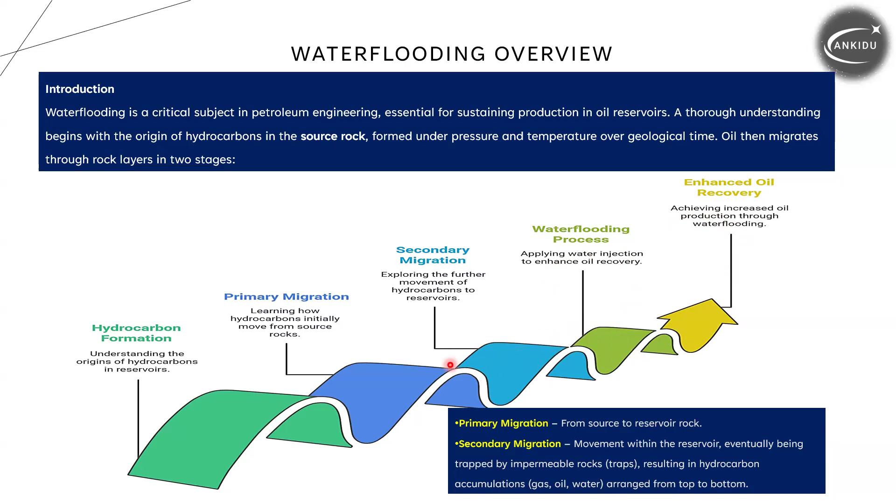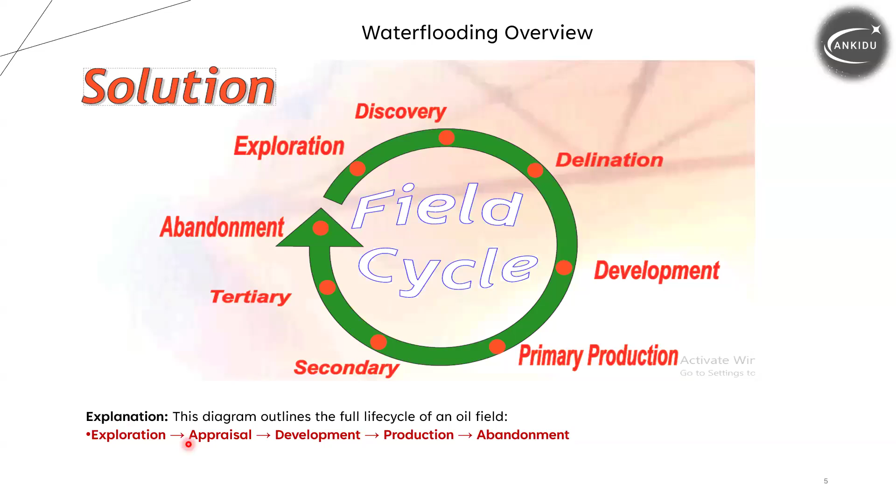Apart from the type of the oil field, is it gas, is it oil, or is it both? So it's going from exploration to abandonment. So let's move through our presentation.

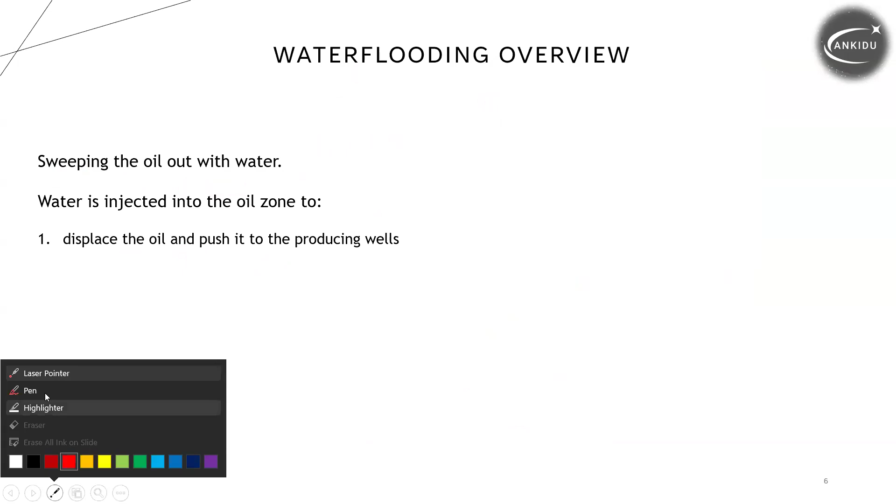So, water flooding overview. It's sweeping the oil out with water. Water is injected into the oil zone. Of course, we know we have to inject some water inside our reservoir. This means displace oil and push it to the producing wells. We know for sure we have a reservoir, and we have both injectors and producers. So we have oil here, and we have water here.

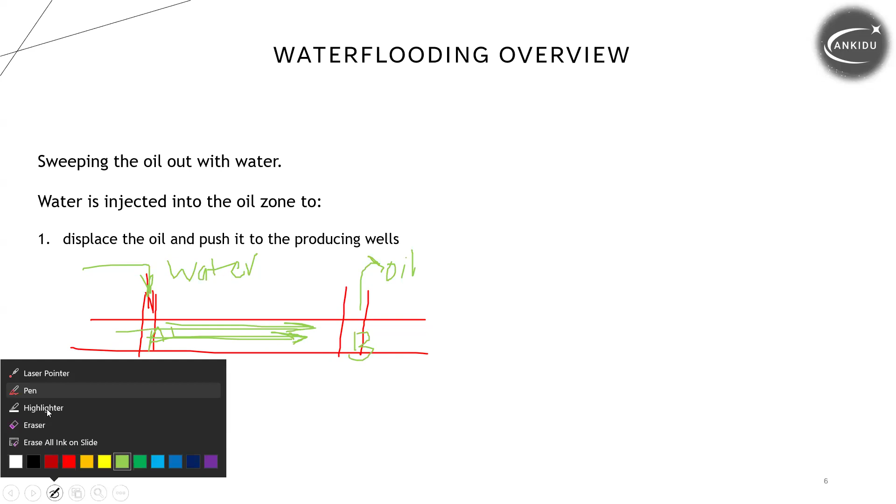So we need to inject water to push some oil to that point and then extract it from the other place. It's a very simple illustration to understand where we have to push some oil from, let's say, point A to point B, and which layer we have to push the oil through from one point to the other. So understanding this is the starting point for understanding what the water flooding principle is. Okay, so let's move on.

So displace the oil and push it to the producing wells. Maintain reservoir pressure. Of course, we know when we start production, the oil rate will rise and then reach what we call a plateau rate, when the production is stable, and then at some point we will see declining production. Why? Because we already have a pressure, and that pressure will decline, and this pressure supports the oil production.

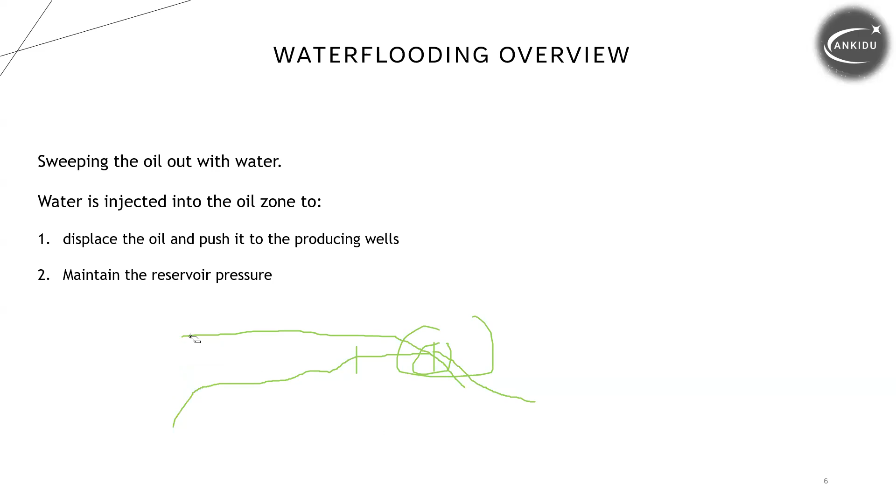When it's declined, at this point we need to think about what we can do to our reservoir to enhance the production. Otherwise, we will lose production significantly from that oil field, because there is no support for that reservoir pressure. So what we can do is water flooding, one of the techniques we use to maintain reservoir pressure. Water is an effective displacing fluid because it's simple and cost effective.

So what are the economics of water injection? Let's see. It's cost: water supply wells, water treatment facilities, pump stations, flow and injection lines, water injection wells. It's considered the most attractive oil recovery method because it's very simple and cost effective.

Having said that, what is the limitation? A significant amount of oil is left unrecovered, because a lot of things happen when we inject water through our reservoir. When using water flooding techniques, some part of the oil is still left. It depends on the field properties, rock properties, reservoir properties. So some amount of oil will be left, and reservoir studies will help us understand why we have this limitation in using water flooding.

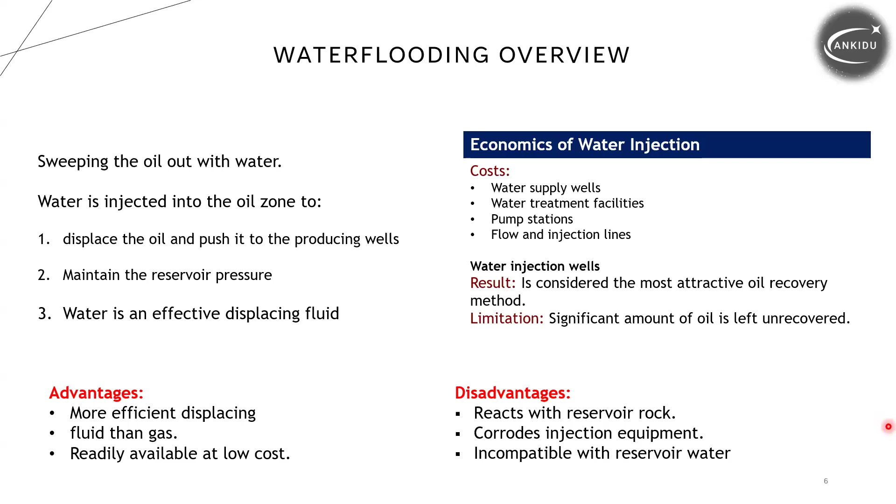Incompatible with reservoir water, of course, there's some incompatibility with reservoir water. Then we have some issue regarding plugging inside our reservoir, how we can mitigate this. It's one of the things happening through the water flooding techniques used to enhance our reservoir pressure and our production.

So, water flooding overview: secondary recovery method. It's considered a secondary recovery method. So inject water to displace oil. Why? We know we have some decline in reservoir pressure. Then we have to inject water to displace oil when, let's say, the aquifer is not enough to support the displacing of that oil, so we need to use another secondary recovery method, which is water flooding, for instance, in our case today.

Maintains reservoir pressure. Again, it's because we are losing some power that's pushing the oil to the surface, which is the reservoir pressure, because we have some dissolved gas, and that gas will separate from the oil. Then we are losing the power to produce more oil to the surface. So it's a secondary recovery method. We use water flooding to maintain reservoir pressure. Cost effective: because it's cost effective, it's widely used.

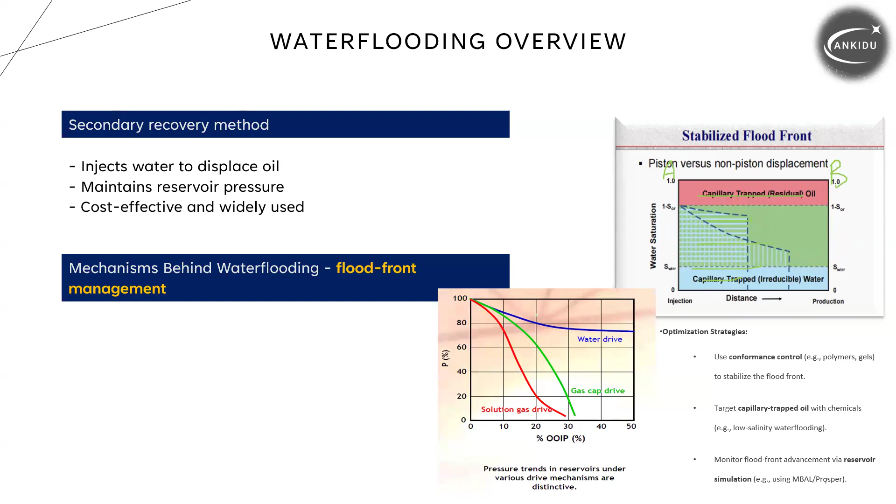So let's see this illustration, starting from this point to this point, which is piston and non-piston displacement. We know already what is piston, so it's piston-like, starting from 0 to 1 when we have all this front going to displace oil from point A to point B. So let me use the pen. So if we decide this is point A and this is point B, all the oil goes in this direction. Let me change the color.

So all the water is going from this direction in a uniform way. So assume a sharp uniform flood front where water displaces oil perfectly. So it's going like this from point A to point B, like a piston, pushing oil forward. Is that happening in reality? No. So this is the ideal situation, which we call the piston effect.

So what is the non-ideal situation? What is really happening? It's non-piston displacement. This is what is actually happening. The flood front is diffuse, with water fingering through the oil. Why? Because we have viscosity differences, capillary pressure forces, or maybe variations in permeability. This all leads to uneven sweep efficiency.

What will happen? We have some trapped oil and irreducible water. So not most of the oil moves from this point to this point, and then we have this phenomenon, which is piston and non-piston displacement. So, mechanism behind water flooding: we need flood front management, because water flooding is the most probable and usable technique, since it's cost effective and can maintain the pressure, compared to other types of pressure enhancement in our field.

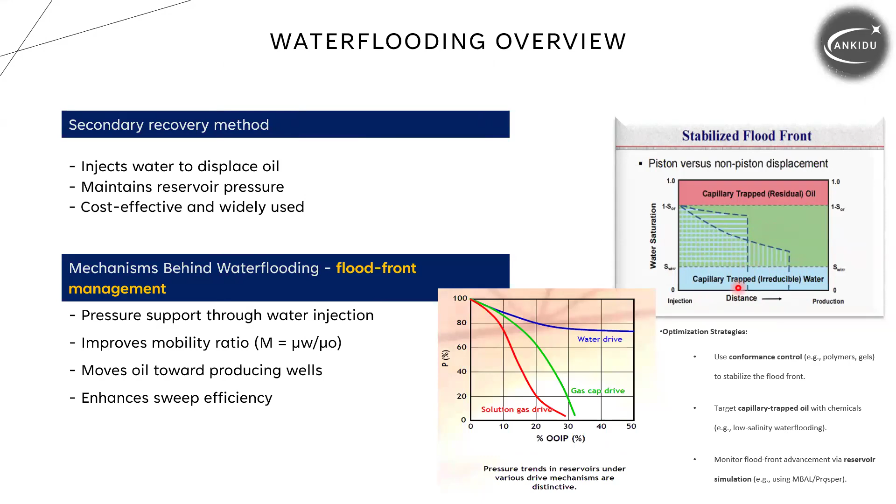And of course, we saw from the previous illustration we have irreducible water, and that's immobile water in the oil zone before flooding. So sweep efficiency we can see through the previous diagram, if we go back. This highlights the challenges of incomplete sweep. So we don't have a complete sweep because of that effect. Okay, so let's go back again to our equation.

So the equation's parameters: it's the porosity, which is the fraction of rock volume occupied by pores. So higher porosity means more oil storage, and for the impact we have an exponent factor of 0.0422. Then the initial water saturation, the fraction of pore space filled with irreducible water before production. A higher SW reduces recovered oil, so that's why we have

a negative sign. The oil formation volume factor is the ratio of oil volume at reservoir conditions to surface conditions. Higher Bo means more gas in solution, so this slightly improves recovery. And we have the permeability and thickness of the reservoir. So we need all these factors when we calculate the primary recovery, estimating our recovery factors through our

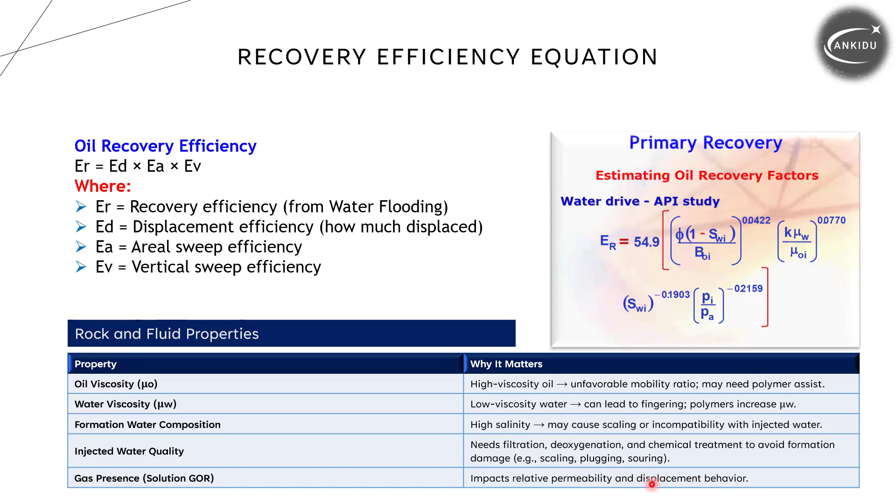So it provides natural energy, of course, but may reduce oil mobility and complicate displacement in secondary or tertiary recovery. So it needs more gas cap management. Okay.

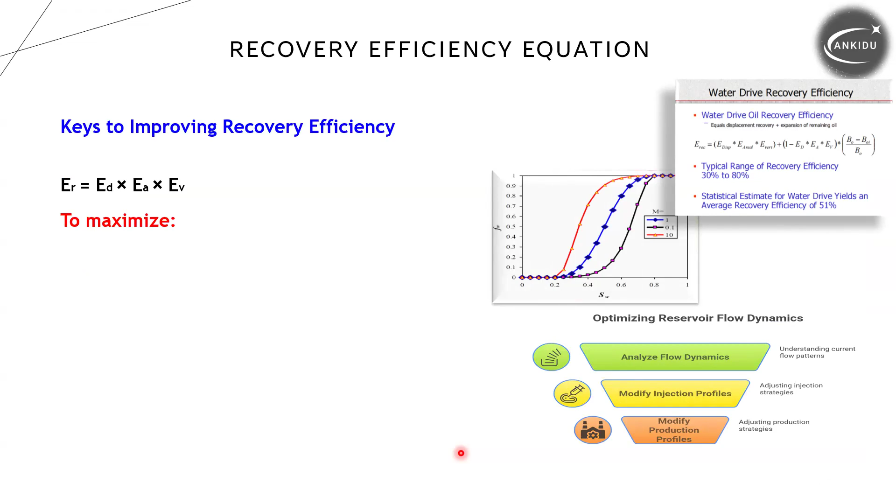So again, to the recovery efficiency equation. So what are the keys to improve the recovery efficiency equation? For the displacement, lower or eliminate capillary forces and lower the mobility ratio. For the area swept, lower the mobility ratio and maybe modify the flood pattern. We will see what flood pattern means. Use infill drilling to enhance the area.

And lower mobility ratio, of course, modify injection and production profiles. Sometimes we need to change the injection rate or the production rates. Then it's very important to manage the profile of both production and injection to have the right results in terms of mobility and sweep efficiency when we consider our injection rates. So use a selective injection and production program. So how we can manage or control that using the selective injection and production program.

So analyze flow dynamics and modify injection profiles, modify production profiles, all working together to optimize reservoir flow dynamics. Otherwise, we have some problems in terms of recovery efficiency. So the typical range is from 30 to 80%. So do we get 30 or 80? It depends how we can modify production and injection. Sometimes more water injected into the reservoir does not mean that we have more oil produced.

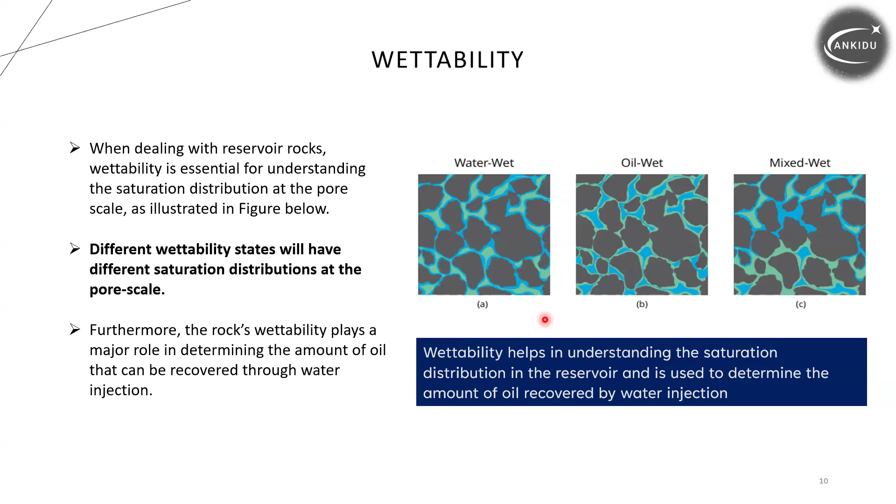What are the factors affecting sweep efficiency? Let's see in terms of the reservoir. Mobility ratio: we know mobility ratio has a huge impact on sweep efficiency. The mobility ratio is lambda displacing over lambda displaced, so it's about permeability and viscosities for water to oil. The mobility ratio should be less than 1. How can we manage that? It's more favorable to have a mobility ratio less than 1.

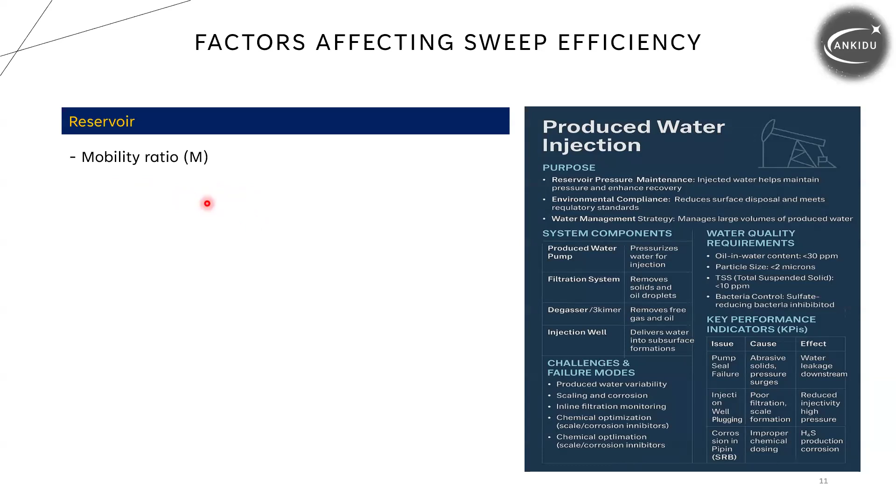The displacing fluid, for instance water, is less mobile than oil, so we have a stable flood front and high sweep. Low viscosity oil with a high viscosity polymer solution may be more favorable. If the mobility ratio is more than 1, we may have viscous fingering and poor sweep efficiency. Reservoir heterogeneity, gravity segregation, and permeability contrasts also matter. Permeability plays a crucial role in sweep efficiency, whether the reservoir is more or less permeable.

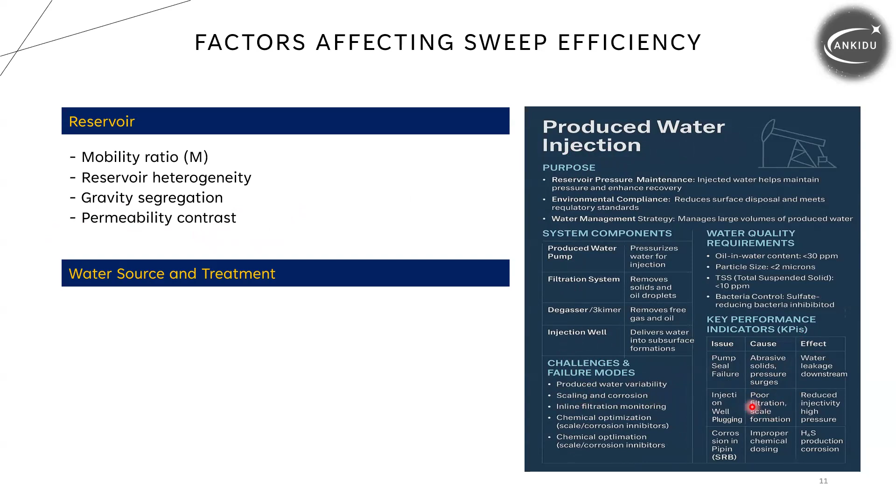For produced water injection, some challenges and failure modes are produced water variability, scaling, and corrosion. What are the key performance indicators? How can we see if sweep efficiency is working well or not? We have metrics for the injection rate and producing rate, corrosion, whether injectivity is reduced, whether we have high pressure, water leakage downstream. We should think about our KPIs for water injection and sweep efficiency.

Water quality requirements: what are the sizes of the particles in the water injected into our reservoir? Do we need bacteria control, maybe for sulfate, and reducing issues regarding asphaltene in our injection wells, which we have seen many times. We have to think about the water source and treatment: surface, produced, and seawater are all sources. Produced water should be treated and re-injected meeting our water quality requirements for the reservoir.

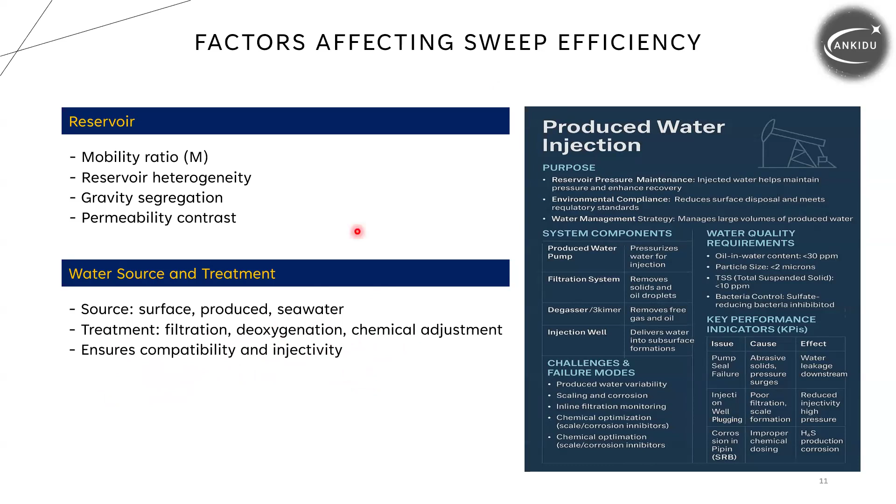We control particle size and total suspended solids in the water injected into our reservoir. Removing these solids is very important, and we can recalculate sweep efficiency after treating our water. This ensures compatibility and injectivity: is the water compatible with our reservoir properties, and is the injectivity compatible with the reservoir's ability to have high sweep efficiency? All these factors play a crucial role in sweep efficiency.

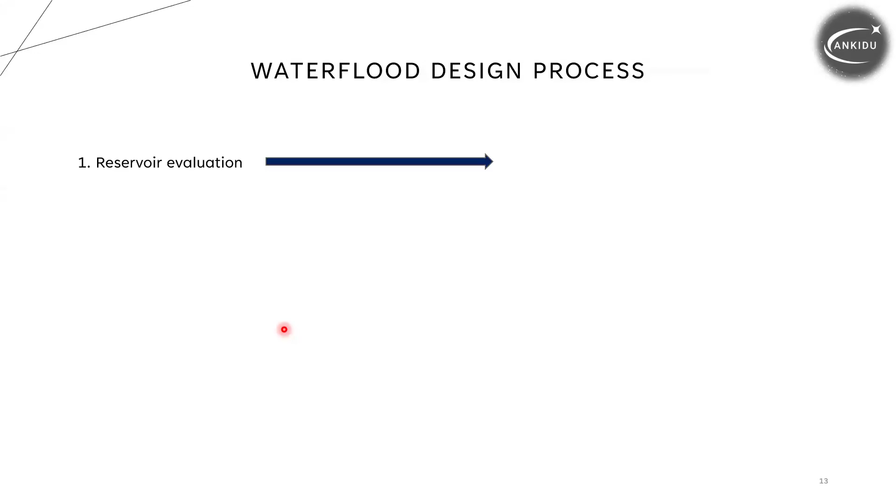Now, the water flood design process: reservoir evaluation. Let's take a look at what reservoir evaluation means: the data to be studied and collected as reservoir characteristics.

Again, we just mentioned what the rock properties are, the permeability, porosity, everything regarding the reservoir characteristics: the areal and vertical extension, isopach, zonation, etc., rock properties, directional permeability, porosity, heterogeneity, reservoir fluid, gravity, formation volume factor, primary production mechanism, what we have in terms of production, what type of production we use, the drive mechanism.

Is it gas cap, do we have an aquifer in our reservoir, what is the pressure distribution inside our reservoir, the oil distribution in the reservoir: is this place more gas, this place more oil, and this place more oil and water? So we have to think about all this in terms of reservoir evaluation. Then we can think about what waterflood design is needed for that reservoir.

Flood pattern selection. After all these data are studied, then we can go for our flooding pattern selection. What is more affordable and compatible according to all these data? So we can run our simulation and think about the flooding pattern selection. And after selecting the right pattern for our reservoir, we can run the simulation and see the estimated efficiency factor for that flooding pattern selection.

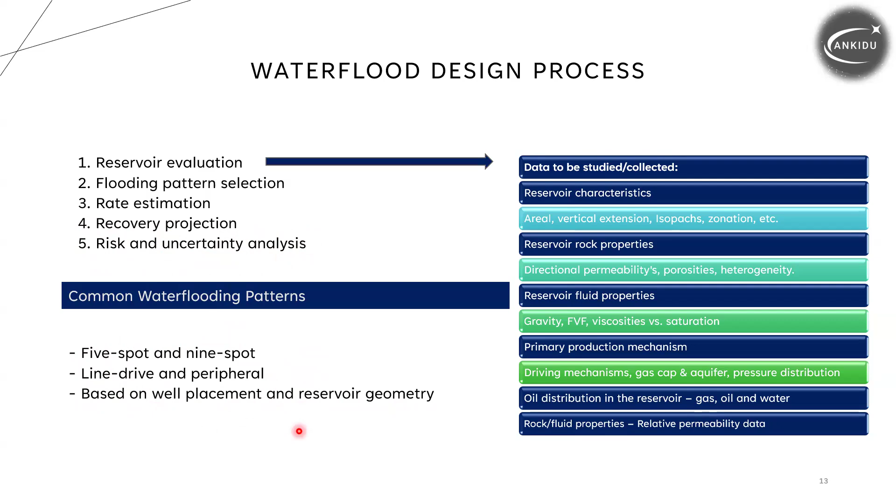So, common waterflooding patterns: 5-spot and 9-spot, line drive and peripheral, based on well placement and reservoir geometry. These are the common waterflooding patterns. So let's see the waterflood layout. A reservoir study is necessary for the proper choice of what?

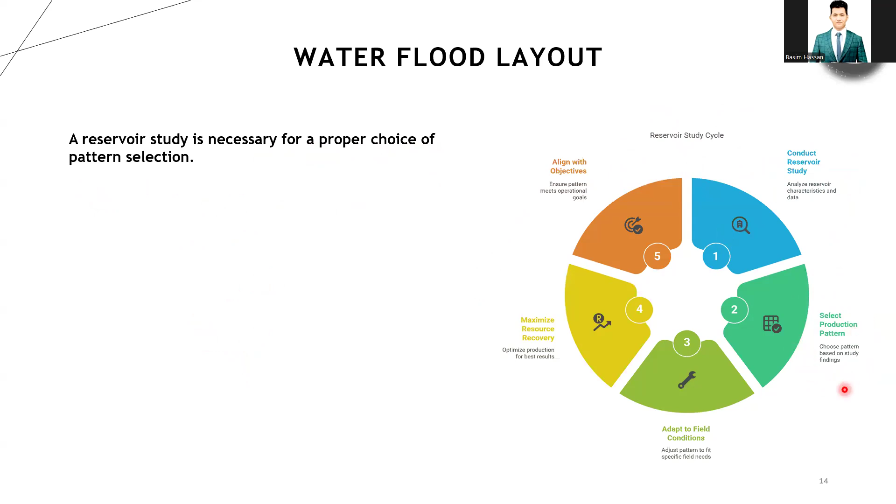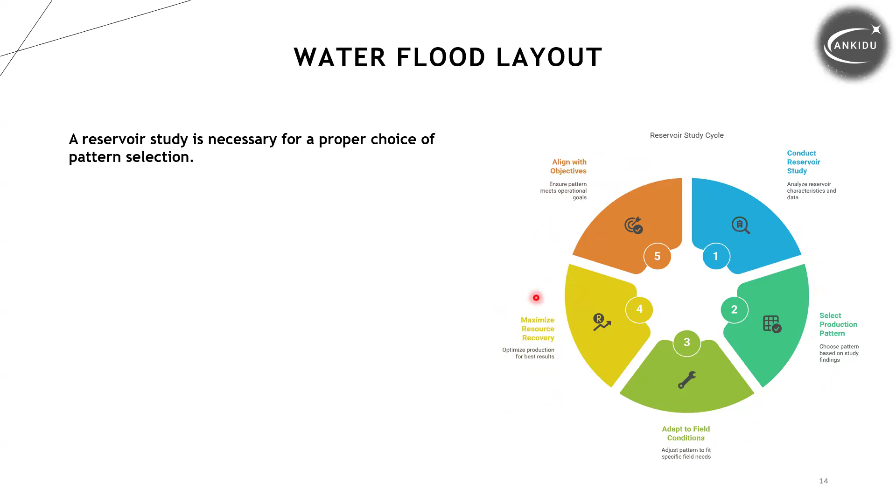Pattern selection. If you don't have your correct reservoir study cycle, you have to conduct the reservoir study, select your production pattern, and adapt to the real field condition, otherwise you don't have this output of maximized resource recovery. So you need to go through these points. It's an essential, mandatory, crucial rule to follow to maximize resource recovery, aligned with your goal of reaching 60%, 70% recovery from your field.

Okay, so in-house study, consulting reservoir engineer: the selected pattern should provide the desired oil production capacity. We think about 70%, the recovery factor we have. Then there's the oil production capacity, for instance, 1 million barrels per day. Then it should be this pattern. The waterflood layout should meet the oil production capacity and provide sufficient injection capacity to support the oil.

Even after selecting the proper layout, without sufficient injection capacity you don't have enough resources, and you cannot reach your production capacity. We already talked about the injection rate: monitor the injection rate and alter it according to your goals. Maximize oil recovery with a minimum of water. How can you manage that?

Sometimes you're injecting more water into your reservoir but not reaching maximum oil recovery. Why? Maybe there are some aspects or risks you didn't mitigate. For instance, you have fractures or fingering inside your reservoir, and all the injected water goes through the fractures, and you don't reach from point A to point B, from this injector to these producers. You don't have correct sweep efficiency inside your reservoir, so you cannot get the expected oil production capacity. So maximize oil recovery with a minimum of water.

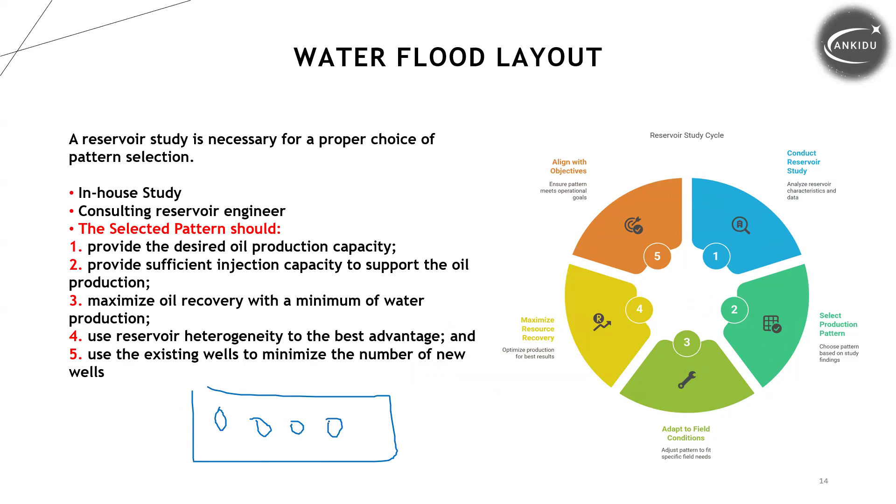What does that mean? The last point, number five. Sometimes you don't have to drill new wells. Maybe some producers will be converted to injectors, and then you don't have to consider new wells. Let's say this is our field, and you have these producers, and you want to use the right pattern selection; then maybe it's good to convert these producers to injectors.

So keeping the producers, it's good to have these wells as injectors. This will minimize the number of new wells. You don't need new wells to be drilled, and you can use them for water injection. You can consider that after conducting the reservoir study.

Otherwise, you cannot imagine whether there is any connectivity between these layers, and whether it's an effective connection, with effective permeability and porosity, etc., these reservoir properties and characteristics. Then you cannot put the right, proper selected pattern for your water flood layout. So this selected pattern is modified as needed to fit the condition of the specific field. This is very important.

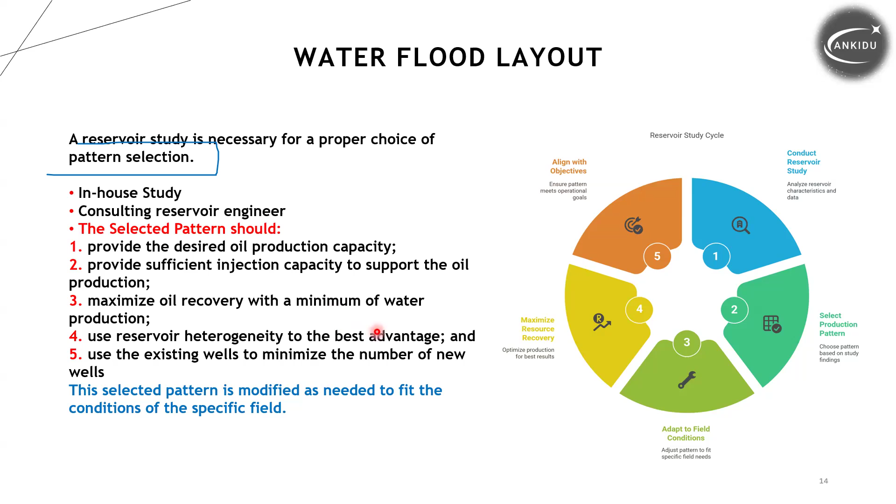This pattern can be okay. I select these wells as the producers and these as the injectors. Maybe I can change it afterwards, I mean the producer to injector to enhance the recovery, change this well to injector as needed to fit what I have in terms of oil production capacity. So you have to think about what you can do. It depends on your monitoring, your outcomes, your management of this water flood project. You need to select the right, proper way.

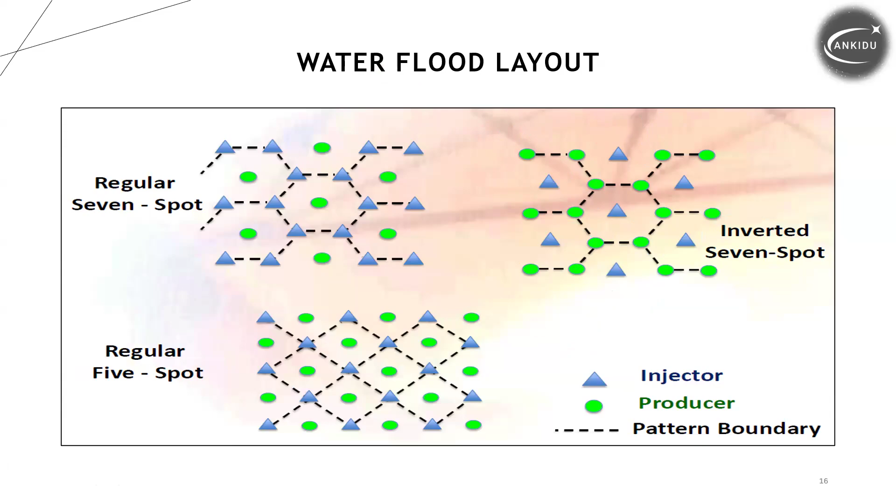Is it fair enough for our reservoir, or maybe we can change this well to an injector, leaving this injector, and inject through this one, because after studying the reservoir layers, there's a good connection between them. Then we can enhance the production from 2 to 5 here and get the targeted oil production rate we planned. These questions can be raised; ask yourself through your simulation, is that what we need from this water flood layout? Okay, let's continue.

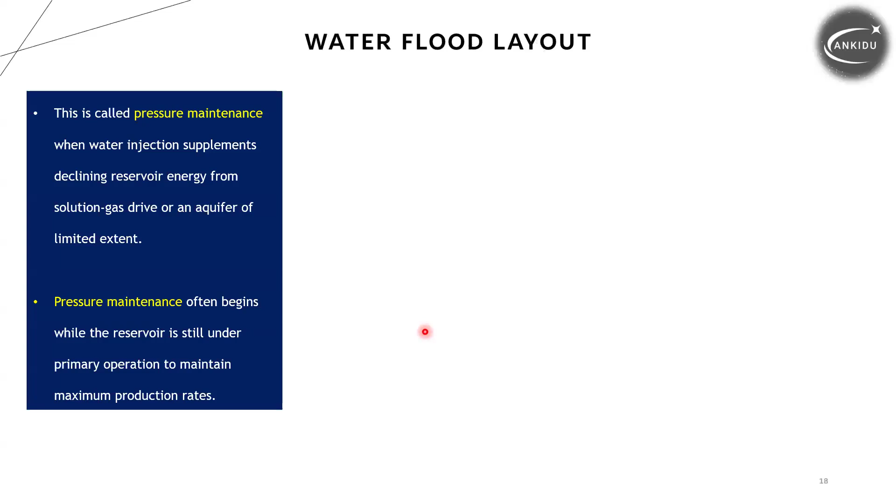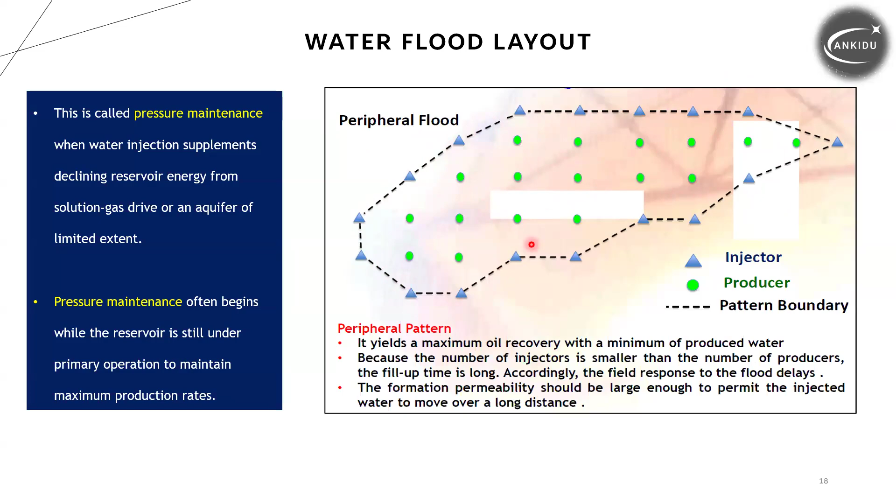Okay. So pilot test. Why do we need a pilot test? How is this related to flooding patterns? Any prediction of reservoir behavior under water flood has a high level of uncertainty. So why do we have uncertainty? Because we've just seen, for example, some wells don't produce as much as we planned through our flood pattern. So a pilot water flood project is a small-scale project, carefully selected.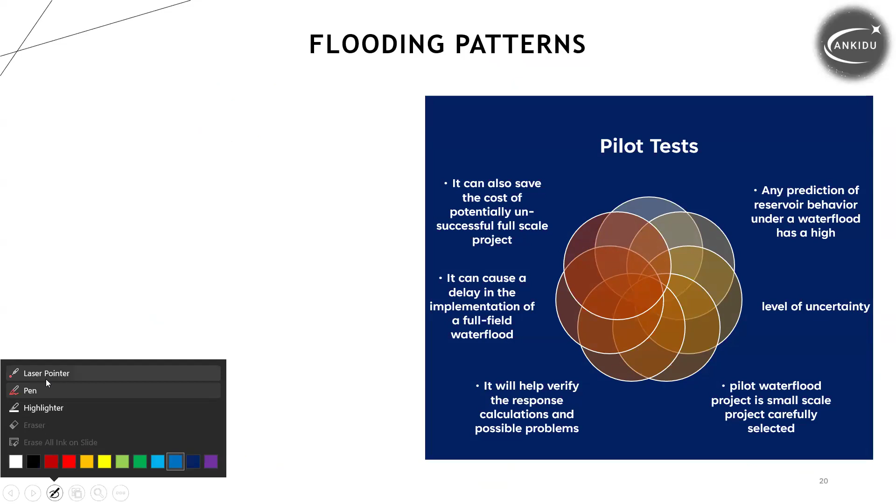So this is what we call here the pilot project, and sorry for my writing. And this is the normal project. Maybe we do all the calculation here and see the response is not as much as we want, so we will not go to the second phase. This is phase one, and this is phase two, and we will not move forward to the normal project. Why? Because we've seen there's a problem in terms of the outcomes of our calculation. So this will delay implementation. It can also save the cost of a potentially unsuccessful full-scale project. That's why some companies go for a pilot test.

We have it, we've seen it conducted in our reservoir. We have a pilot test, and then we can see. It depends on the time considered for the project. Is it a 1, 2, 3, 4 year project? So from day one, we have a pilot test for 3 months, 6 months. It depends on the outcomes and what the response calculation is.

So injection wells and spacing. Well spacing is determined by the primary drilling spacing. Producers are converted to injectors, maybe. New infill injection wells are drilled as required, for instance when we need to drill new wells. Production loss from converted wells: we have to consider how much we lose because we convert some wells to injection wells. So what is the production loss? It should be considered because we have a target oil production rate afterwards. Usually very low net oil rates when water flood is applied.

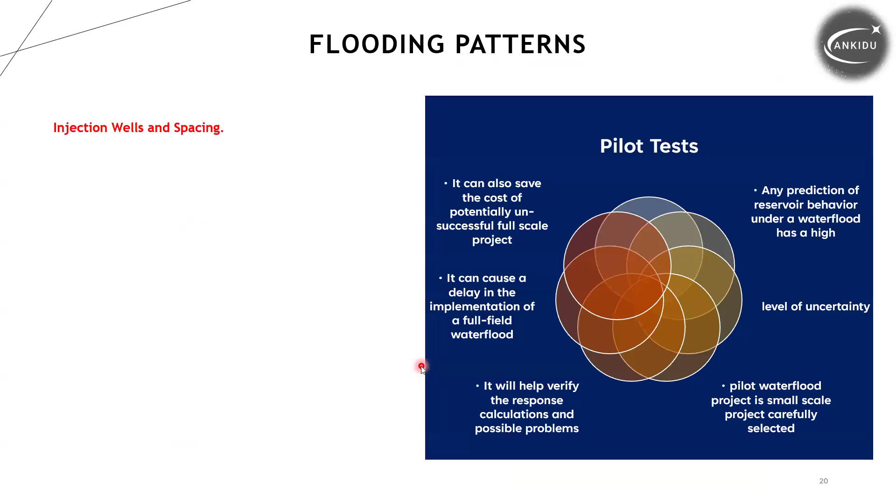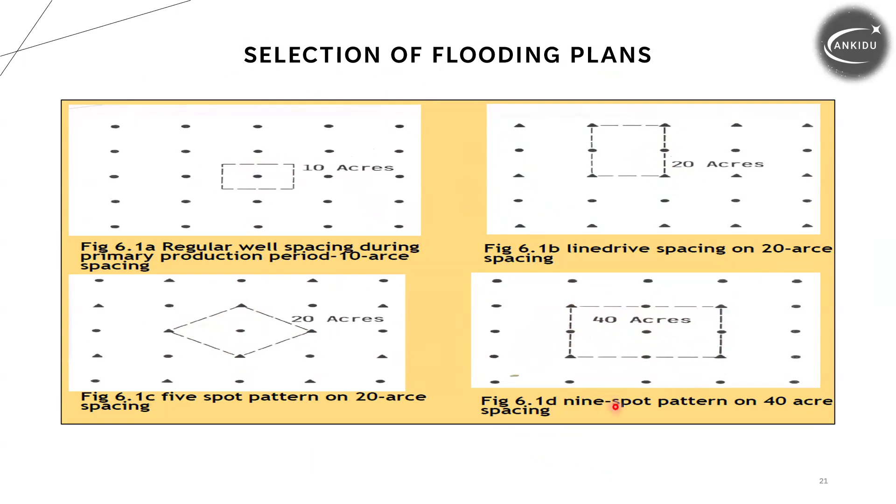Marshes, for instance, lakes, rivers, urban areas, mountains, etc. All of these are terrain and topography affecting the well pattern. Selection of flooding plans depends on the spacing. The spacing plays a crucial role in using the right flooding plans. So you have to consider the spacing, and then the effect of injectors on your producers. Then you have to select the right pattern for your field.

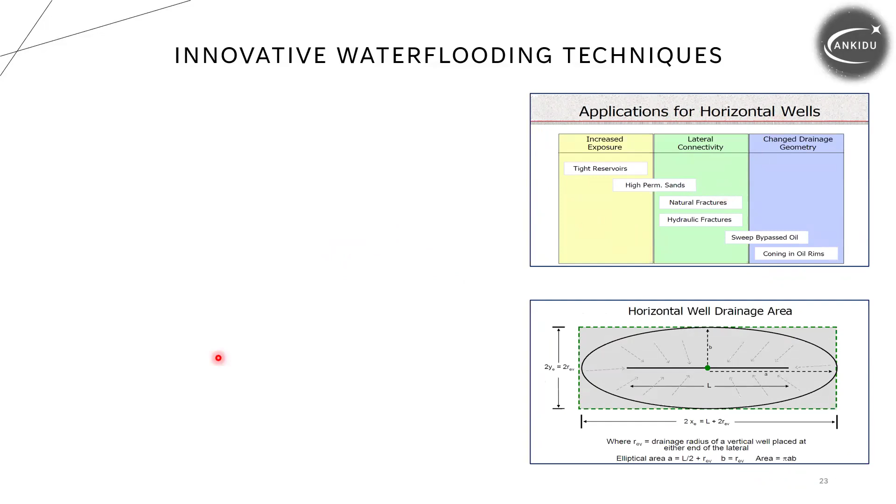Innovative water flooding techniques. What do we mean by that? Maybe you can use horizontal wells. If we consider this is the vertical, and you have this layer, it's only this area. When you consider horizontal wells, this area is connected to your reservoir, and then much more area can be affected by water injection. And if you have a nearby horizontal or vertical producer, it's more enhancing the oil recovery from these wells.

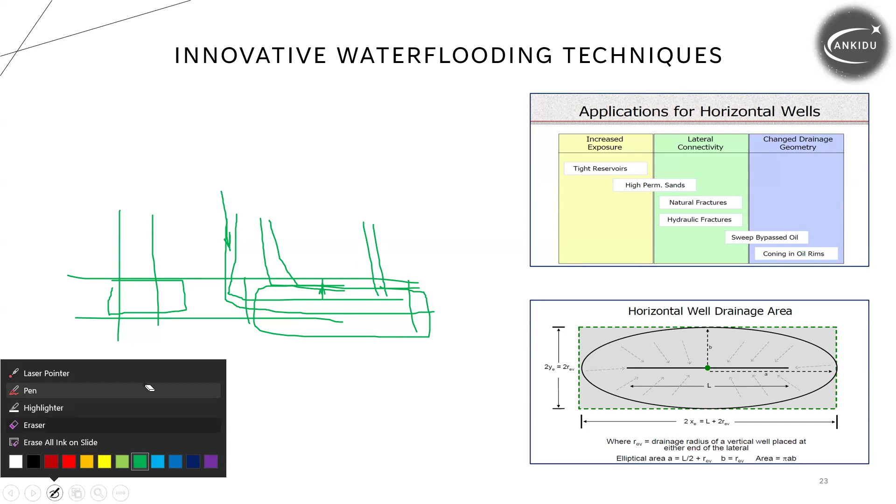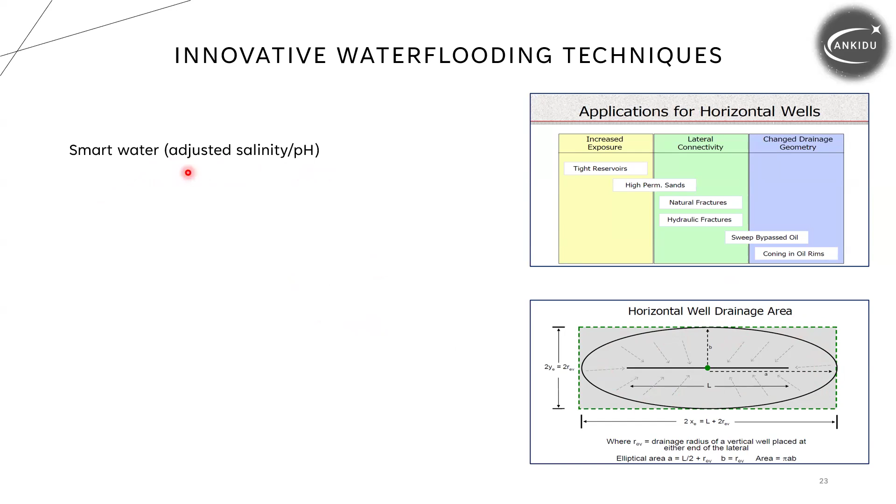So one of the techniques you can use is converting or drilling multilateral wells when you have a horizontal well, because you have a huge drainage area. That drainage can affect the production profile for your field. Smart water, I mean adjusted salinity and pH, polymer assisted flooding, horizontal injectors, selective zone injection. So what does that mean?

So when you have injectors here and a producer here, maybe this well is perforated in this area. Let's change the color to make sure you understand. This is formation one and this is formation two. With selective zone injection, maybe you want to inject only in this area and enhance production from this interval, and leave this area with no injection because maybe there's aquifer support or gas support, so the pressure there is no problem. Maybe you have more water produced, a high water cut, and you don't want to increase that water cut from this interval. So you only inject in this interval, enhancing the sweep efficiency for this area. Selective zonal isolation injection.

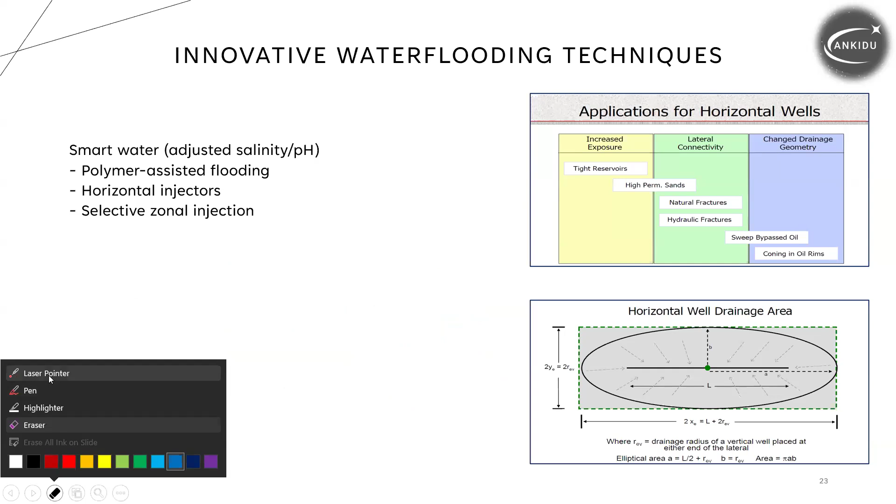It's very important to have the right, proper injection model for your reservoir. So you have to think about whether it's one area or two areas when you consider your injection profile.

Fractional flow analysis, calculating fluid saturation, helps determine breakthrough timing. Having said that, when we have this producer, this is the formation and it's perforated here. So where there's breakthrough of water, or for instance fingering effect inside your reservoir, you leave some portion of oil that's not recovered through your production injection profile.

Let's change the color. That will be good. So this oil remains unrecoverable through your production profile. So you have to think about when this phenomenon can happen, and then you can eliminate that factor by using another type of production or injection profile. It guides optimization of water injection, guiding you to the most effective optimization model for your injection.

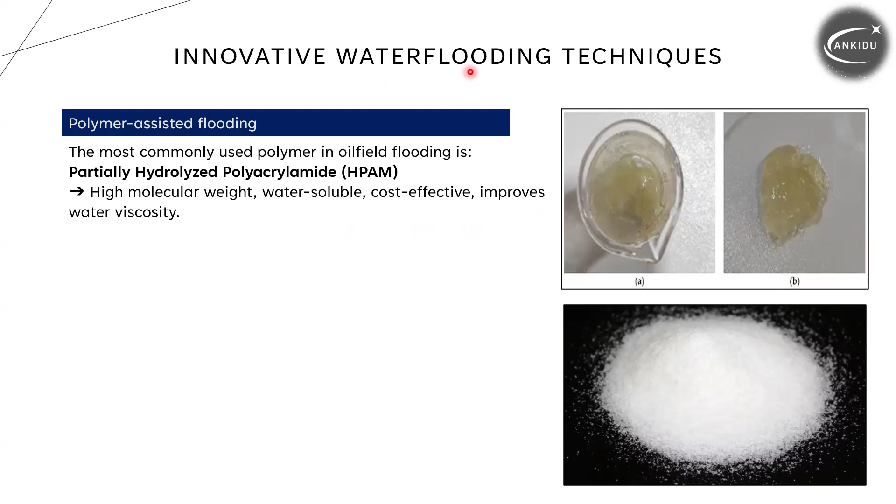Again and again, without proper studies for your reservoir, you cannot implement your water flooding the right way, because the study gives you the right keys for implementing your flooding techniques. Okay, so other advanced types include, as we said, xanthan gum. It's tolerant to salinity and temperature. It's used for high salinity reservoirs, more than 75 centigrade and more than 20,000 ppm.

Hydrophobically modified polymers, HMPs, are advanced for high temperature or high salinity reservoirs. So again, there are different modified types of polymers. It depends on your use when you want to use these types in your field. HPAM dominates over 90% of the polymer flooding market, so that's why it's more selected by the companies. Why? Because it's cost effective.

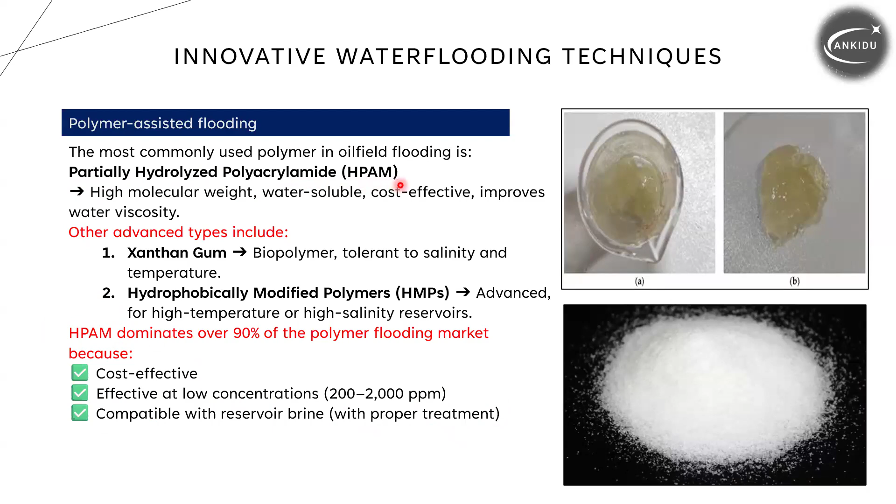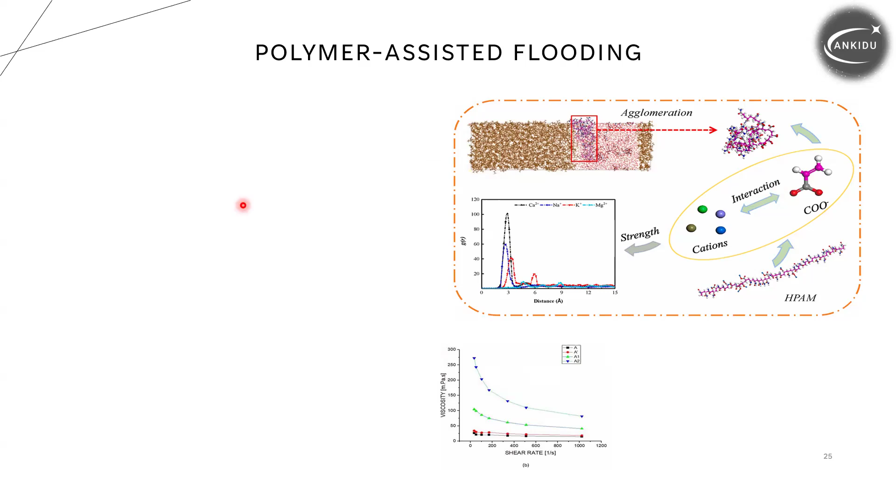Effective at low concentrations, 200 to 2000 ppm, compatible with reservoir brine with proper treatment. So that's why they use partially hydrolyzed polyacrylamide, HPAM, in water flooding. Okay, so this is how HPAM works when it's injected inside the reservoir, and the effect afterwards of using this polymer with the water flooding profile.

So the simulated results show that all simulations have a stable layer order and clear crude oil and oil-water interface after dynamic relaxation equilibrium. After that, it's more relaxed and in equilibrium with the reservoir, so you have a clearer crude oil-water interface. HPAM molecules were agglomerated in different forms at the crude oil-water interface depending on inorganic

cations in the water. They studied how this polymer can interact with the reservoir rocks and properties, and they saw proper results when using this type of polymer, and it's more cost effective and more compatible with reservoir water. So the stability of the interfacial film was positively correlated with the gyration radius of the HPAM molecule. This study was implemented to see if it's suitable to use this type of polymer.

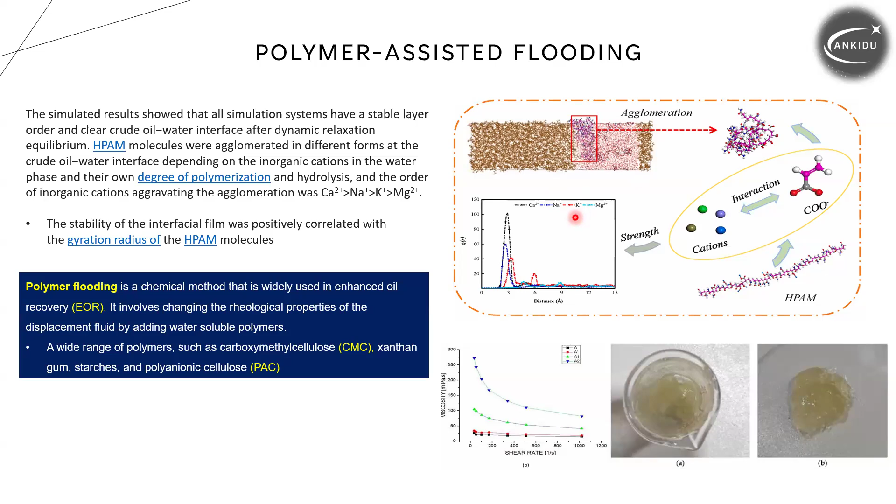So it's more commonly used with the water flooding profile. Of course, horizontal injectors have more area connected to the reservoir, so the injected water can reach the area of the producers, and if we consider a horizontal producer, we can reach more area with less cost of injecting water inside our reservoir. Then the sweep efficiency will be enhanced after using this technique for our injection profile.

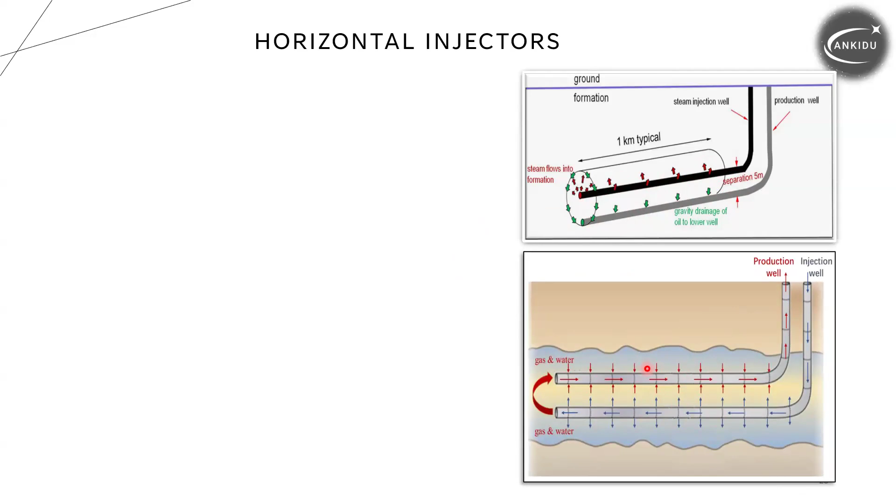So more gas or water injected, more gas or oil produced. So what do they provide to the reservoir? Enhanced contact area. That's what we want from our horizontal wells. More contact area, then we can enhance the sweep efficiency of our reservoir rather than just using the regular, typical type of vertical wells.

So reduce coning and channeling. That's because horizontal wells have more connected area compared to the vertical, so we have a good contact with the produced oil wells or gas wells. Then we have less coning and channeling happening through this type of injection wells.

By distributing injection pressure across a long horizontal section. Of course, one of the primary objectives of using water flooding is to enhance reservoir pressure. So when you use horizontal wells, we have a long area enhancing the sweep efficiency, enhancing the production, and enhancing the pressure, which enhances the production rate from our producer.

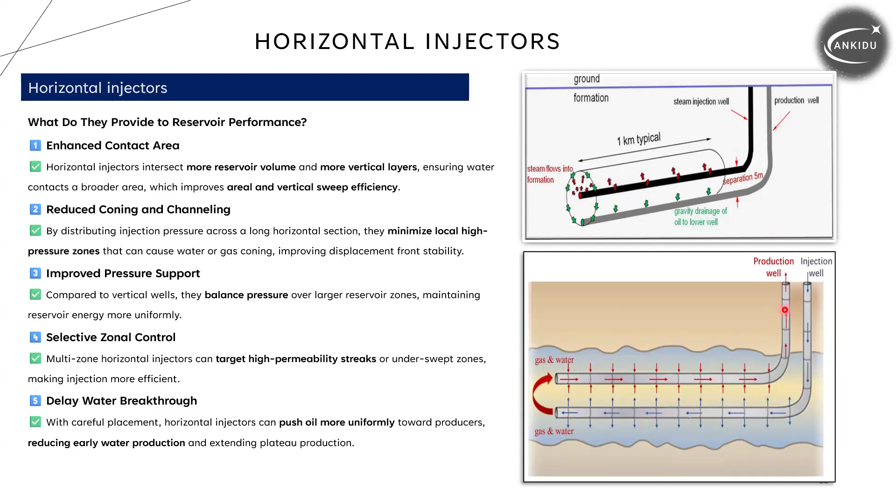Then, after monitoring our production and injection profile, we can select proper zonal isolation for our injection profile. Then we can reduce or delay the water breakthrough. So with careful placement, horizontal injection pushes oil more uniformly towards our producers. That's why we select horizontal wells rather than vertical wells in our production injection profile.

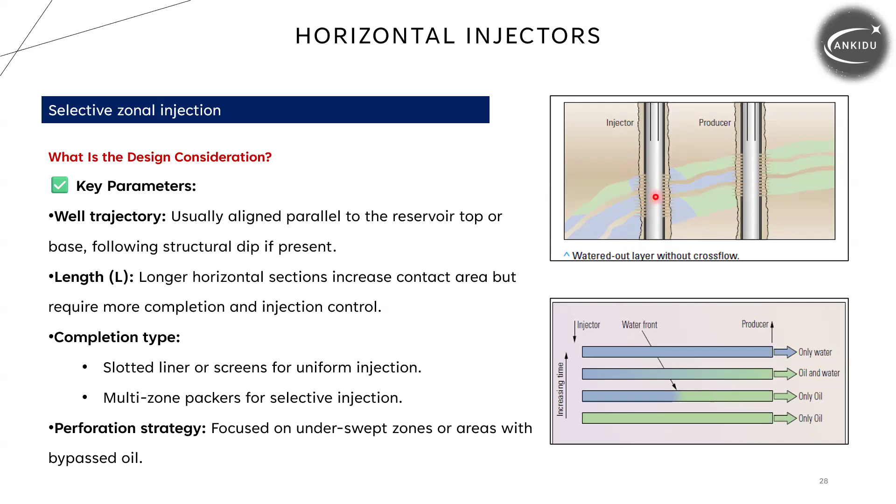Okay. Challenges in flooding. Sorry, maybe it will be a little bit longer. I hope you still enjoy it.

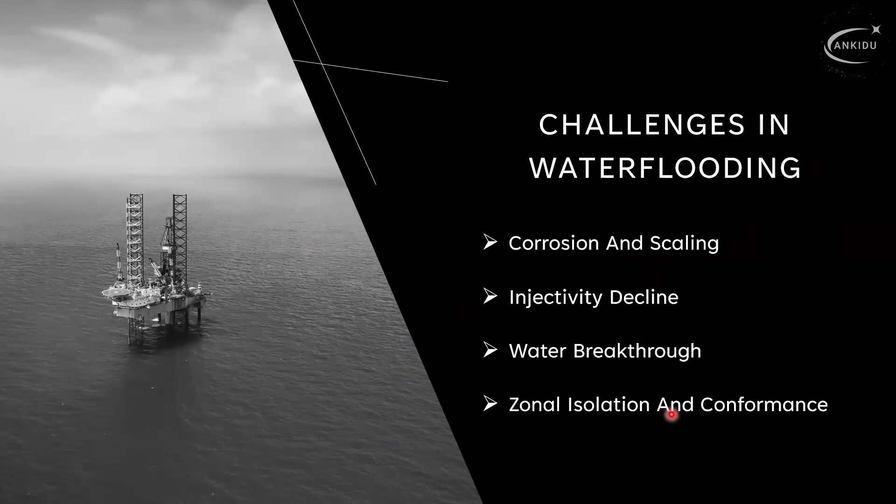So corrosion and scaling, injectivity decline, water breakthrough, zonal isolation and conformance. All these are challenges in our water flooding. So corrosion and scaling.

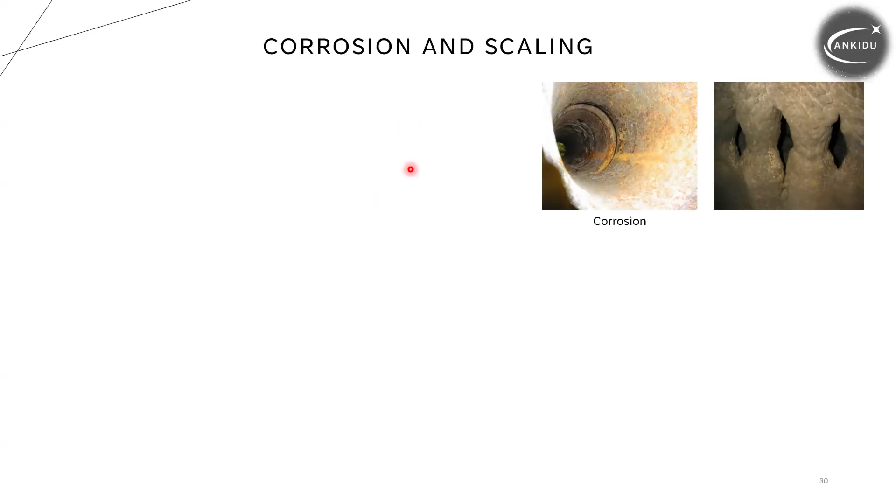Why it's considered one of the major factors and problems in our water flooding is because we always have corrosion, because of incompatible water or unwanted material selected for our injection profile, and incompatibility of produced or injected water with formation water. Then we may have these problems, damaging the wellbore tubing and the pipelines at the surface. And these can be considered the major players of

increasing the budget for maintenance and removing these scales or replacing these types of tubings, because we have asphaltene, and this corrosion may lead to holes inside our tubing or casing, and then we lose some injectivity from our water injection profile, and then we lose some oil produced afterwards. So it's one of the major players in terms of the factors affecting our water injection.

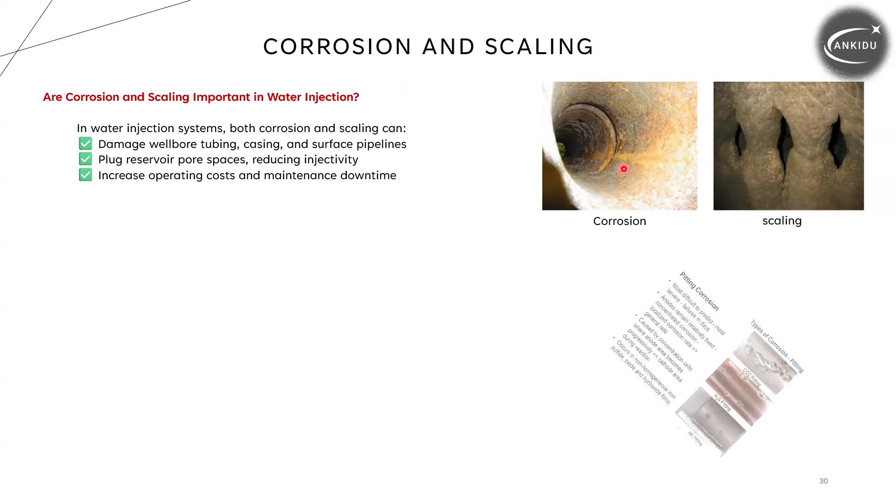So this type is pitting corrosion, when you have it inside your completion for the injection. For instance, when we consider converting some producers to injectors, it's still the same material, but the type of fluid used is different. So this may be one of the causes of corrosion in water injection, because you don't have the right material. For some period of time there is a good injection profile, then we have corrosion afterwards, and this is one of the types of corrosion. So you have to consider the mitigation for this.

For instance, vacuum towers for deoxygenation units, chemical scavengers, or corrosion inhibitors to reduce the effect of corrosion and scaling in your material and your injection wells. So all this depends on material selection. Having said that, maybe you convert some producers to injectors, so it's still the same materials as for producers, but for injectors they're not compatible and not useful. So you have to think about these factors when you convert wells from producer to injector. It depends on the material selection.

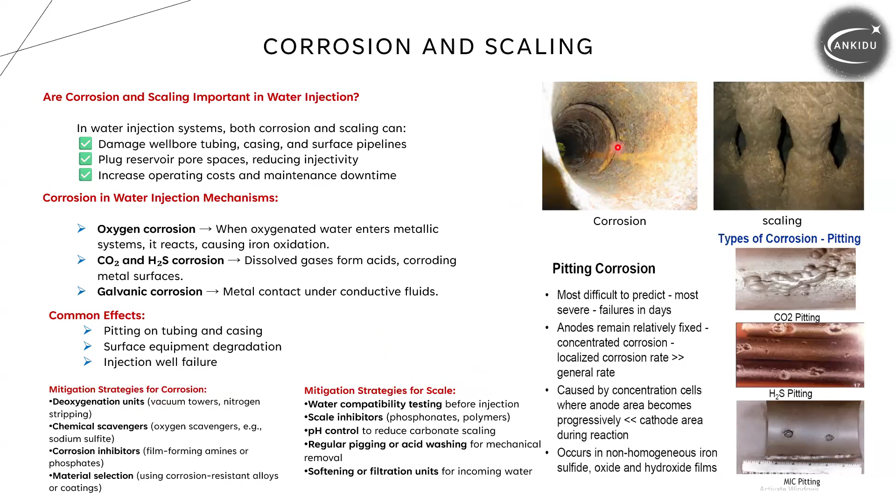Okay, so what types of innovative techniques do you need to consider in terms of monitoring your injection wells? Fiber optic sensors. The fiber optic sensor, for instance, in corrosion solutions, lets you monitor the corrosion rate. These sensors can tell you exactly if there is any problem at any point, and you have to start the right mitigation process right away to reduce the corrosion inside your pipelines, your wells, your facilities, and then you can extend the life of your facilities and pipelines.

So these techniques are now very common because they're more useful, more powerful, handy tools. I mean the fiber optic sensors to monitor what's going on inside your pipelines and wells. And then you can reduce the timing of maintenance and lost production from injectors or producers, and reduce these kinds of corrosion stress and effects inside your wells. So putting the right sensors in used injectors can reduce the corrosion levels inside your materials.

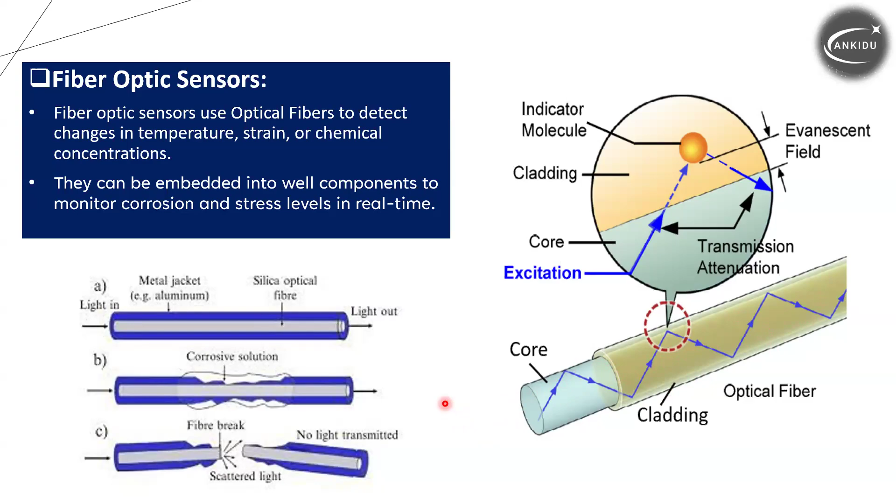And injectivity decline, of course, you have to think about when you have a filter cake outside or inside your reservoir. So formation plugging is one of the types of problems that happen afterwards when using the injection profile. This type of cake happens either externally or internally inside your reservoir, and then you need some mechanical tools to remove this formation plugging and formation damage caused by contamination of clay inside your reservoir, and that does not enhance your injection profile.

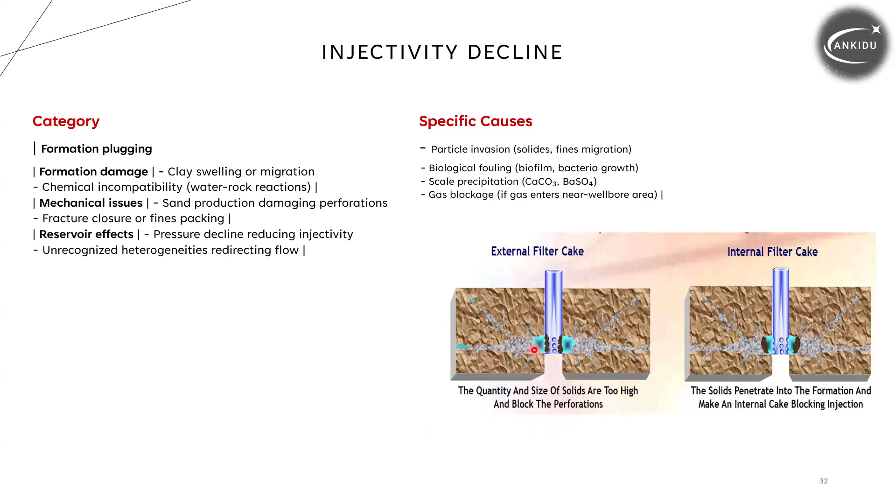So what type of mitigation or removal tools to use depends on what's happening inside your reservoir and what the problem is. So what is the innovative solution applied? Smart water injection. What does that mean? It alters wettability and reduces near-wellbore resistance. Companies, for instance, Equinor, the North Sea and Saudi Aramco use these techniques for smart water injection to enhance the water injection profile and reduce these effects by altering wettability.

Pulse injection and pressure cycling. So, for instance, you can change the injection profile and change the amount of water injected into your reservoir.

Maybe they can enhance or reduce the plugging in your formation, like BP using these tests in tight sandstone, for instance, and that's one good example where they reduced the plugging in their formation.

Microbial enhanced water injection, which stands for MEWI. It uses beneficial microbes to clean the near wellbore. They use a type of bacteria to reduce the effect of these cakes inside the reservoir, and reduce the effect of this filter cake, which affects the injection profile.

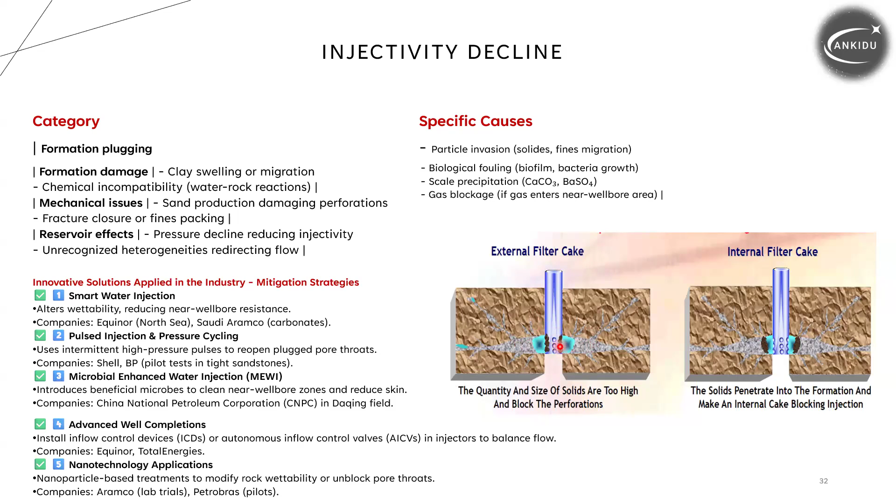Advanced well completion, of course, by selecting the right zonal isolation and injection profile. And the last one is nanotechnology application. It's based on modifying rock wettability again, or unblocking pore throats inside the reservoir. So these technologies can enhance or reduce the filter cake effects. They can reduce the blocking of your formation and the formation damage.

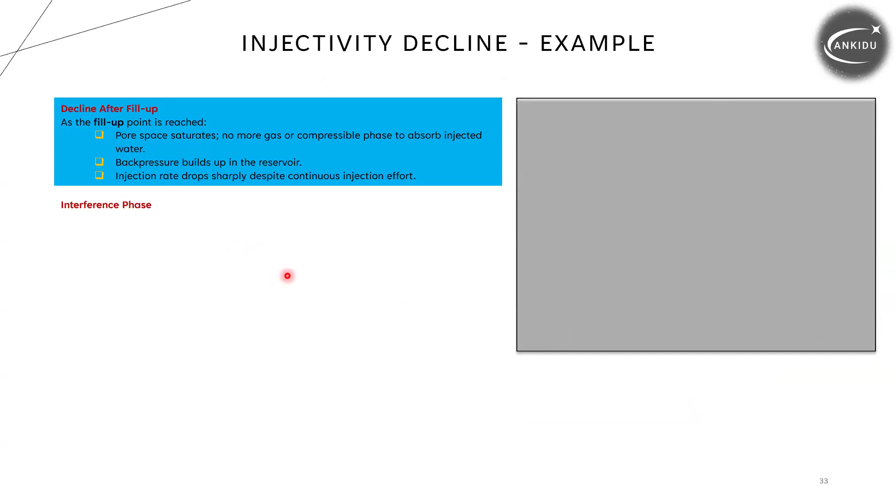Okay, so another example for injectivity decline: decline after fill-up. So the fill-up point is reached. I don't know why it's not showing. There should be an illustration here. We cannot see this example, so we will pass through.

But it's for injection when you reach the point where you fill the pores inside your reservoir, and then the injection declines, because pressure interference between injectors starts. So it's between the injectors themselves. Water injection into one well causes pressure buildup felt by surrounding wells. So it's like this profile. At this point, you have these problems occurring.

So it limits additional injection rates per well. So you cannot inject more. For instance, you have this injector, and the formation cannot take more: if you inject 5 MBD per day, you cannot inject 6 MBD because it has reached full capacity of injection. So you need to think about how you can enhance the injection rate through your formation.

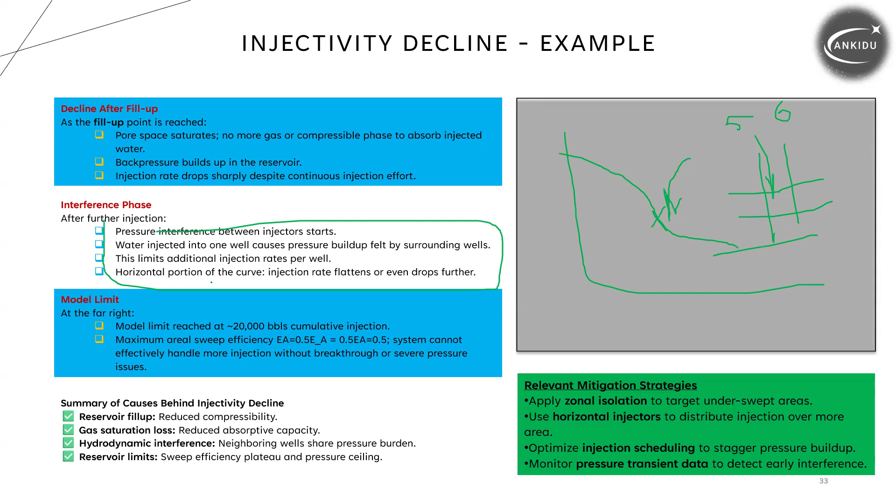A horizontal portion of the curve, which you cannot see, is this one. Injection rate flattens or even drops further. So here there's an extra drop in the injection rate. So we have to think about when this can happen, because this will limit the injection rate.

The relevant mitigation for that is zonal isolation or using horizontal injectors, because horizontal injectors cover a large area, so you can select more area to inject through. So it gets closer to the number you want for the injection rate. Also optimize injection scheduling. That means maybe you can inject 5 here for 1 hour, here for 2 hours, here for one day, etc. It depends on the outcome of pressure buildup for the nearby producers.

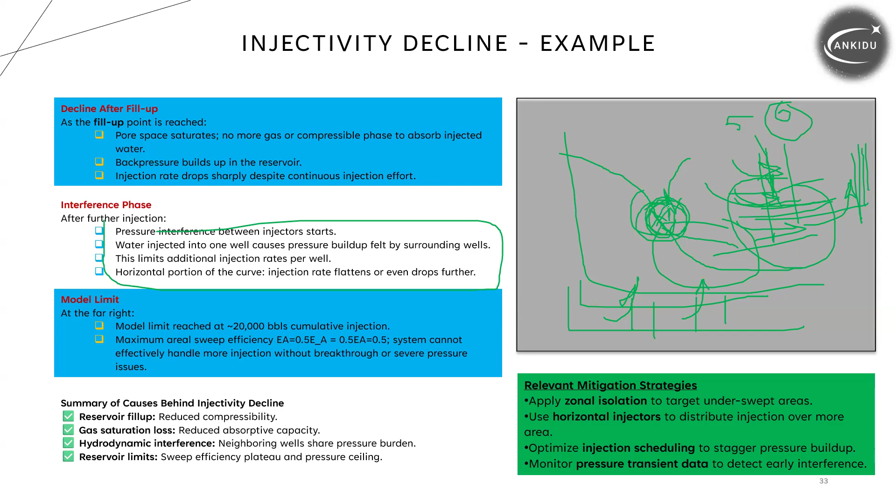Okay. Monitor pressure transient data to detect early interference. Because you have the pressure injection profile, then you have the production profile, so you can see what the pressure is inside your formation. When you monitor this pressure transient data, it will detect this phenomenon early, the interference. So all these can be seen through the injection profile.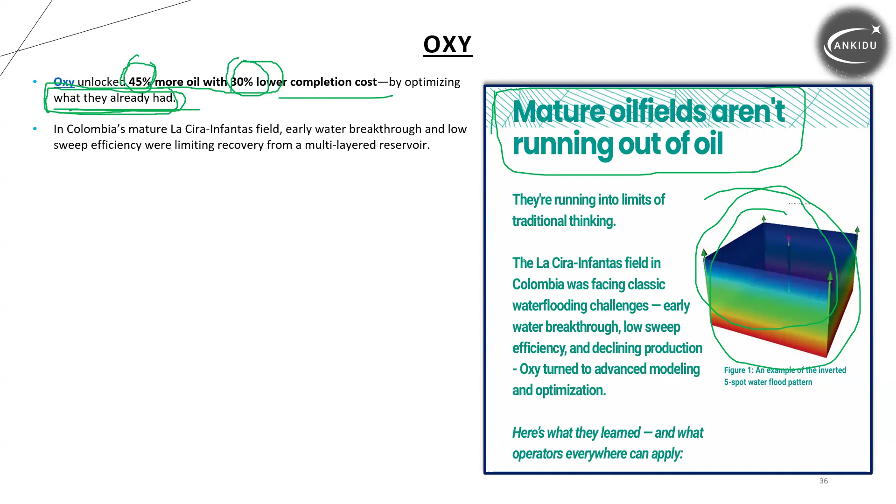So they have this reservoir, which they already had. So 45% more oil with 30% lower completion cost. This is a successful example of increasing cumulative oil production and reducing completion cost. Six optimized valves versus nine, improved sweep efficiency and better reservoir conformance. So this is what they achieved: a higher water injection rate only where it created incremental value.

So they used the best injection rate, after using advanced modeling to optimize their injection rate. This is the achievement of their 45% increase in cumulative oil production. It's a very huge increase as a target for their work. This case is proof that field-wide returns can be unlocked through smarter wells. This is the key point here, the innovation in their work: smarter wells, design and simulation.

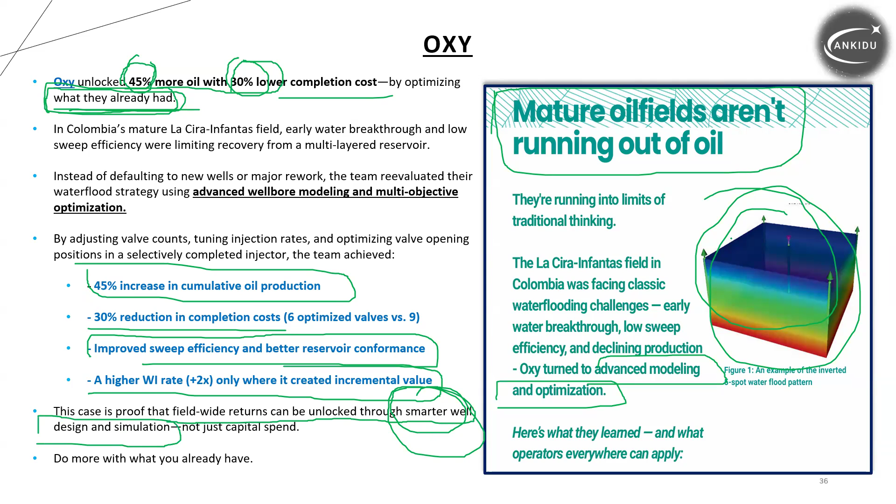They design their wells and run the simulation and see where they can get the highest producers and the good injectors, not just capital spend. They don't want to spend money for nothing, but for something rewarding. So it's worth going for. So it's one of the good challenges and successful projects by Oxy.

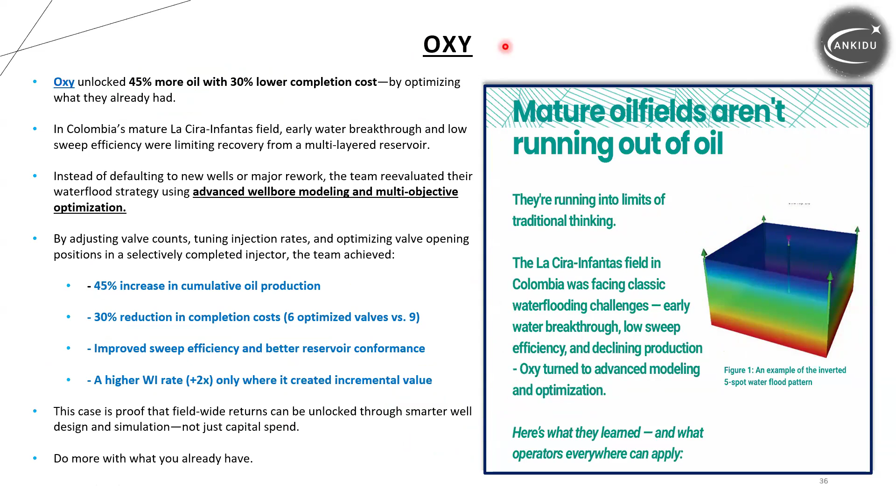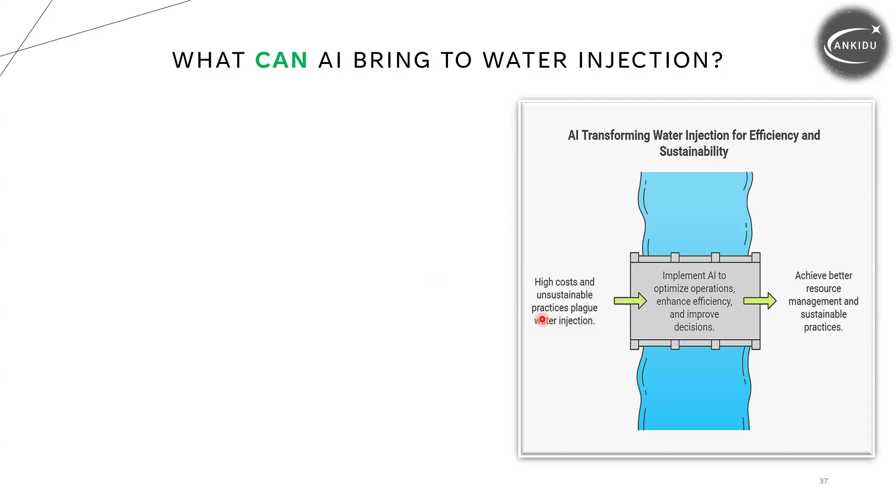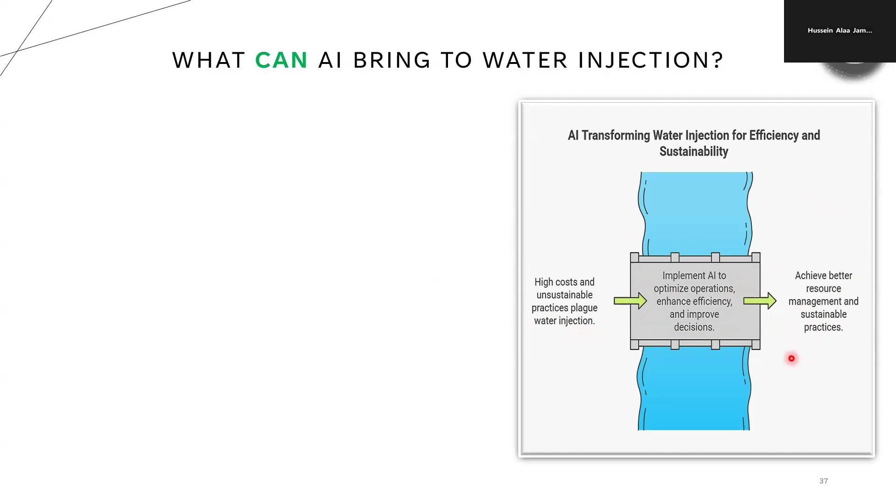So operators everywhere can apply. Okay. What can AI bring to water injection? So AI transforming water injection for efficiency and sustainability. So high cost and unsustainable practices plague water injection. After implementing AI, they do the optimization, and it can optimize the operation, enhance efficiency and improve decisions. What we can achieve: better resource management and sustainable practices.

So pattern optimization and dynamic injection adjustment through using the right proper AI tools, and through them we can analyze historical injection and production data. So this is the first point. Analyze historical injection rate and production data. Recommend which injectors to ramp up or down. Again, if we think about this is the injectors, how we can inject water through, and then we can have how much oil from this layer through the producer. So recommend which injectors to ramp up or down.

It means how many barrels can be injected, the amount of water, balance reservoir pressure without over injecting. This is the most powerful statement I will say regarding using the AI, because the right historical analysis will give the right decision making afterwards. So without over injecting, we don't need to inject more water inside our reservoir. Then we can have the right production rate for our oil producers.

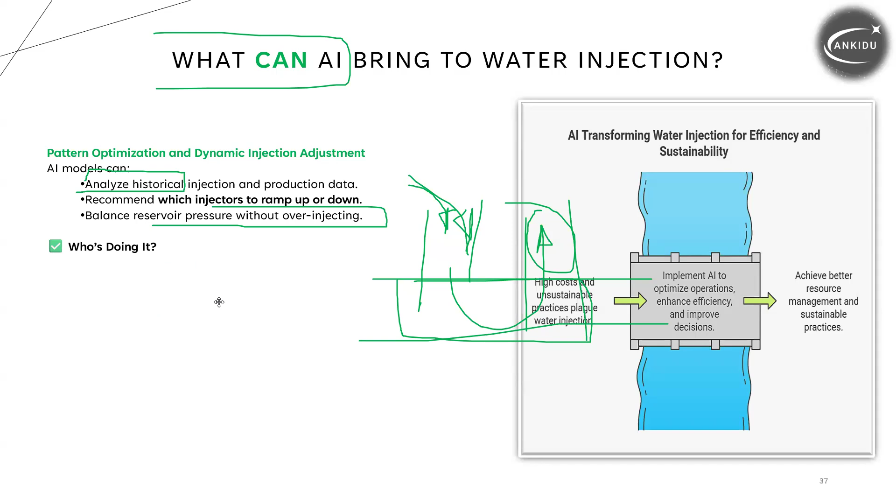So who's doing it? This is one of the questions you can ask. Who's doing this project? Equinor, in Norway, uses AI to manage smart water injection. So this is one of the companies using AI tools in the North Sea. If you know, Norway is located in the north of Europe, on the North Sea, adjusting salinity and injection patterns in real time. So this is the point. It's a wonderful one. Salinity and injection patterns in real time. So they have all the data in real time, so they're adjusting. This is the key point here.

So having said that, we agreed we can do some alteration in our injection profile. So this is the key point, adjusting salinity and injection rate in real time. This is the point when you have these successful projects using the AI tool in the right manner. Okay. So what are the results? 5 to 10% increased recovery and reduced water handling costs. So this is a major achievement for the Equinor company to have 5 to 10% increased recovery.

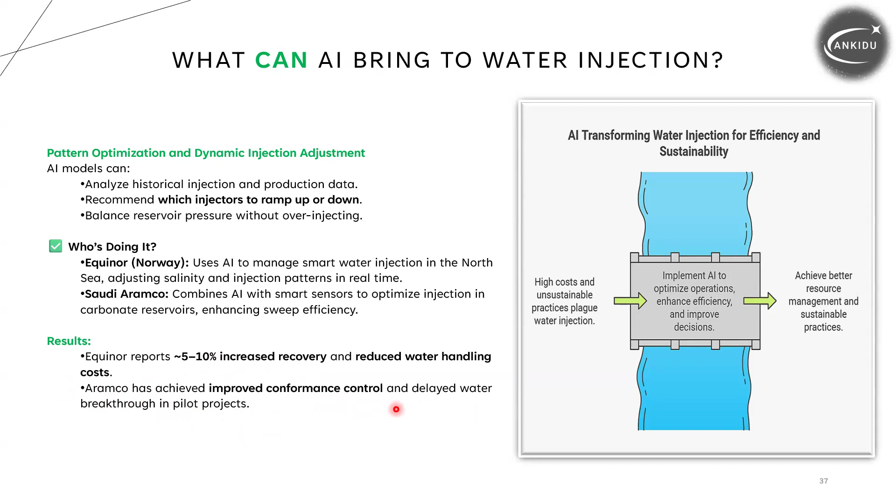Aramco has achieved improved conformance control and delayed water. Aramco is the company controlling and managing the Saudi Arabia oil fields. So it achieved improved conformance control and delayed water breakthrough in a pilot project, but it's in pilot projects.

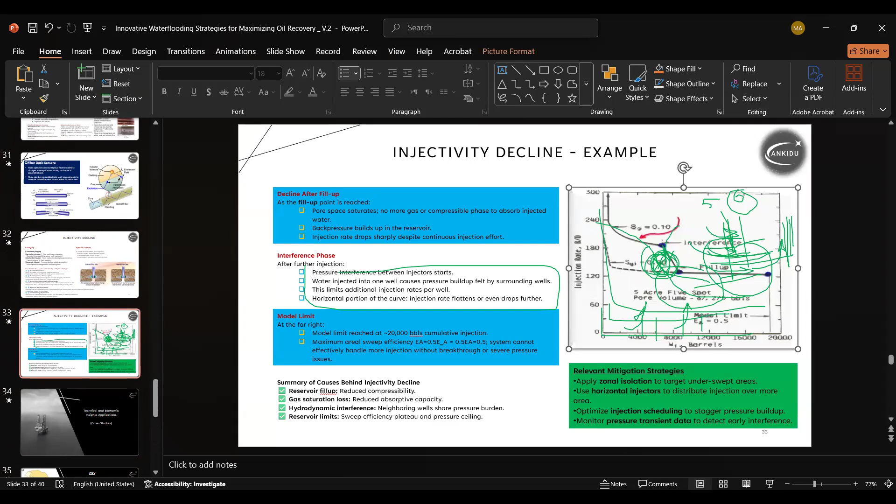I don't know if this is the last one or not. Yeah, I think this is the last one, doctor. Okay, Mr. Mohammed, can you please show us the image which didn't appear on your slide? I think I sent it to you, if you can check your inbox, just a bit, if there's a possibility. Yes, I think you can see the screen right now. Yes. Just a minute. Yes, so this is the screen for the example. Let me erase. The eraser is not working. Sorry.

So from this illustration, you can see where the interference happened between the injectors, and there's a failure and fill-up of the pores, and there's a reduction in the injection rate because there's interference between the injectors themselves, and there's the fill-up of the pore spaces inside the reservoir. So you have water injection in terms of barrels and injection rate. It dropped significantly because of that factor, the interference and fill-up. So this is one example of injectivity decline.